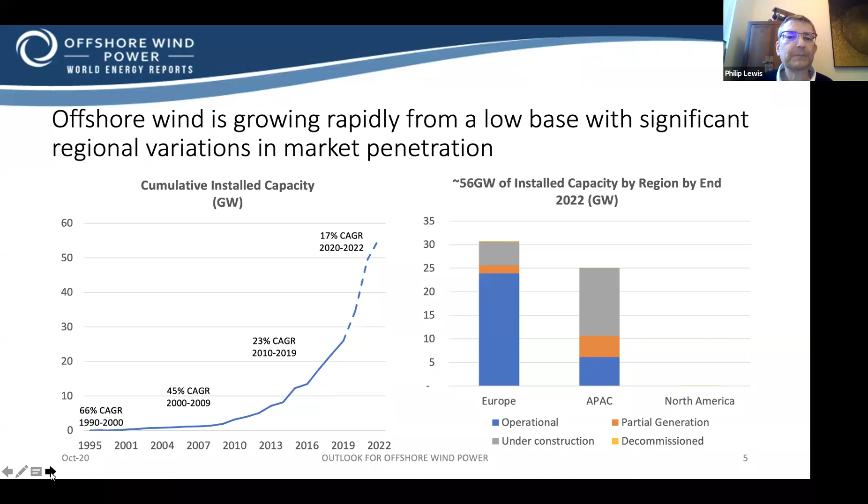Europe, Asia, and North America lead the way to around 205 gigawatts of installed capacity by 2030, calling for around $390 billion of investment. Again, driven by Europe, mainly the UK, and Asia, China driving there. And then we'll see the US become a top 3 player by the end of the decade. Next, please.

As the industry matures in key markets, CapEx and OpEx costs are falling, making wind more competitive. Offshore wind LCOE is reducing, witnessed by historic and current auction prices, and puts offshore wind in a competitive band with fossil fuels in European and Chinese markets, and is set to reduce around 10% each time installed capacity doubles.

Wind farm CapEx is around $3,000 per kilowatt with transmission, or around $2,000 per kilowatt excluding transmission, obviously with regional variations and project variations. Lifetime recurring OpEx provides significant opportunity for the OEM and logistics support supply chains. As we see from the pie chart on the right, O&M forms a major part of lifetime spend on an offshore wind farm, and turbines the largest single CapEx item. Next, please.

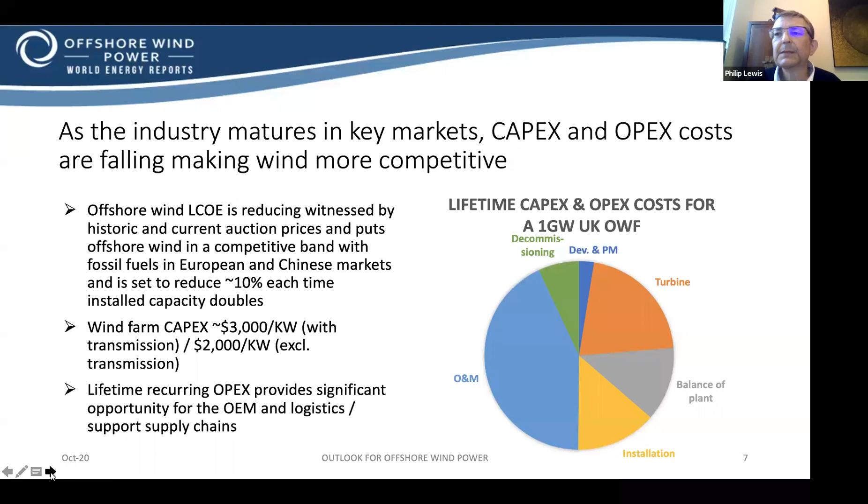So let's have a look at some of the technical developments in offshore wind, from foundations accommodating deeper water projects, turbines and installation vessels getting bigger, transmission substations getting bigger, and wind becoming a key element of supporting hydrogen in energy transition. Next, please.

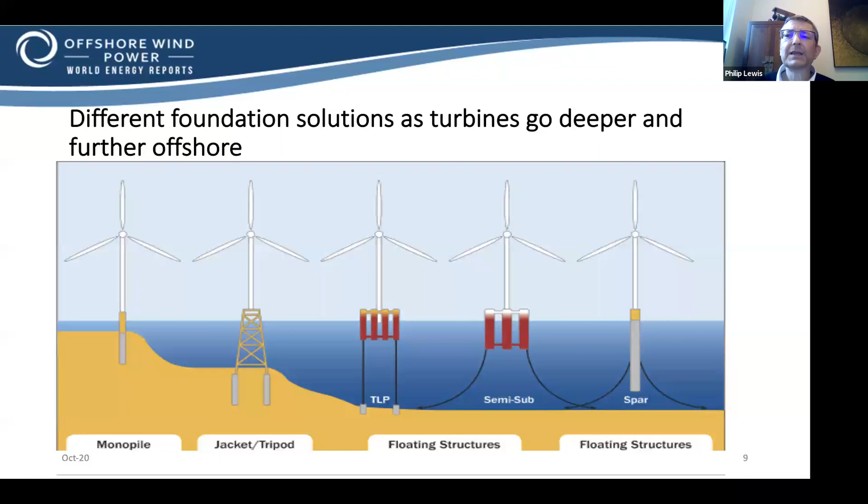So different foundation solutions are seen as turbines go deeper and further offshore, from monopiles and jackets, tripods, currently seen to be in a 50 to 60 meter maximum water depth, in the future probably going up to 70, 80 meters, with floating offshore solutions from 30 meters, but really cost competitive over 60 meters, and that's TLP, semi-subs and spars. Next, please.

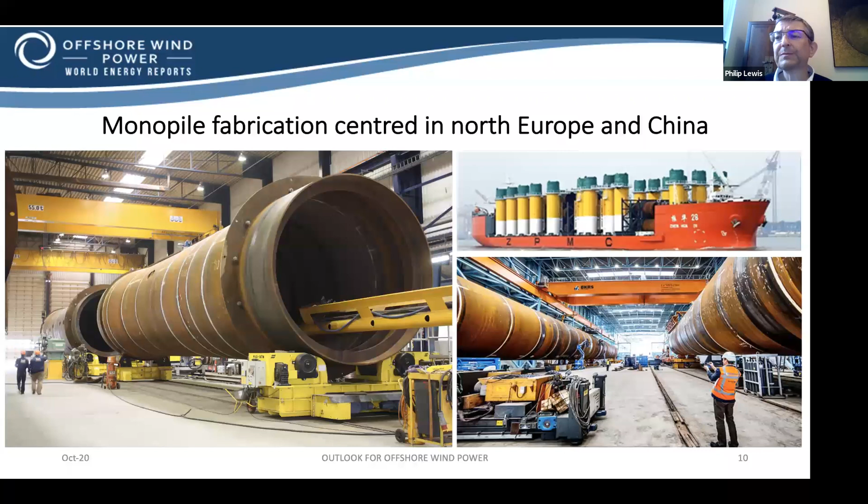Monopile fabrication is centered in North Europe and China. And for the US projects, we expect to see leading European manufacturers team up with US manufacturers, such as the Gulf Island and EEW tie-up from Massachusetts. Jackets are being fabricated from a wide European, Middle East, Southeast and East Asia yard base. As you can see from the pictures, a large amount of space is needed. We've seen in the US that Gulf Island produced the jackets for the Block Island offshore wind farm. Next, please.

Larger turbines are driving larger wind farms with higher capacity factors and lower costs. We are seeing the current 12 megawatt GE actually uprated to 13 megawatts, rolled out this year and next year, with a 220 meter rotor diameter, and the Siemens Gamesa unit at 14 megawatts, which has already been selected for projects in Taiwan and the US.

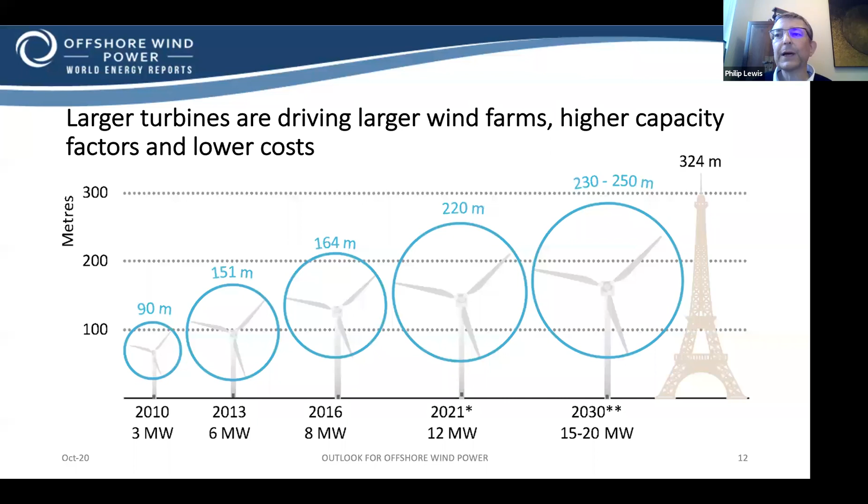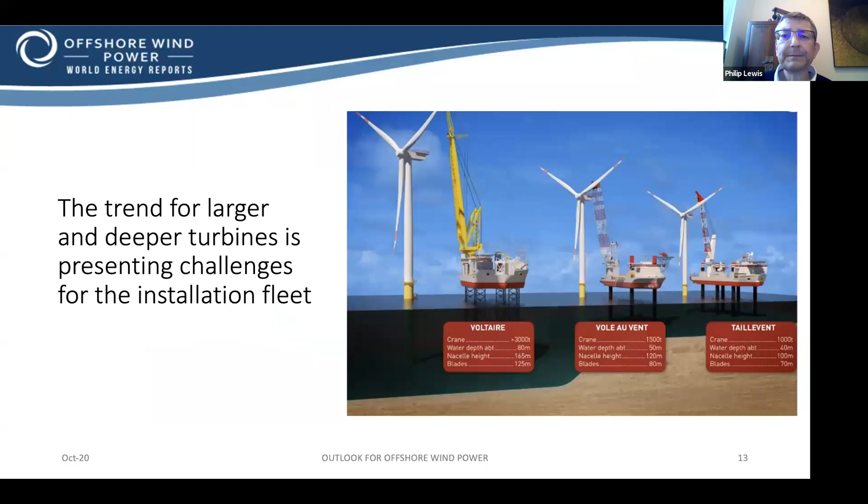The trend for larger and deeper turbines is presenting challenges for the installation fleet. Effectively, the new generation turbines cannot be installed by vessels that were built as close to 10 years ago. This creates opportunities for a wider range of vessels.

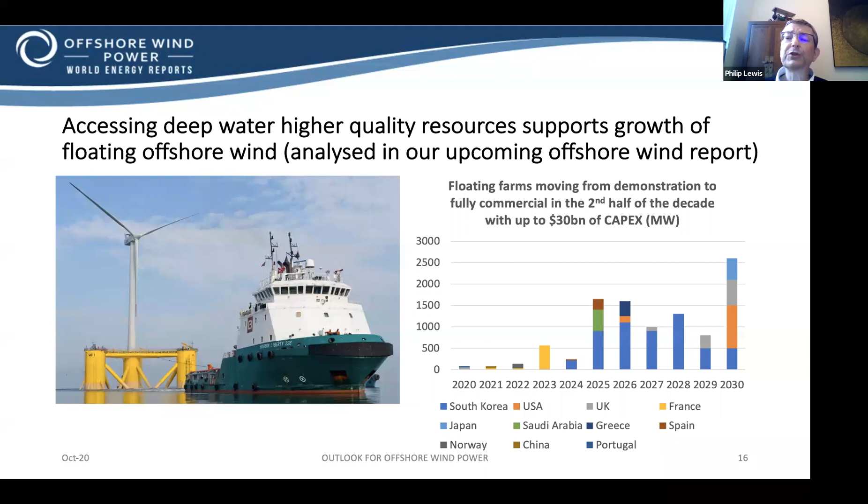Accessing deep water, higher quality resources supports growth of floating offshore wind, and this is analysed in our upcoming offshore wind report. Floating farms are moving from demonstration to fully commercial farms in the second half of this decade, with up to $30 billion of capex expected. We expect to see the first US commercial wind farm by the end of the decade or early next decade.

This large scale calls for an industrial approach to building offshore wind farms to feed installation. Foundations, fabrication and assembly for a 500 megawatt commercial wind farm can see 125,000 tons of steel to 425,000 tons of concrete used, basis delivering one foundation per week.

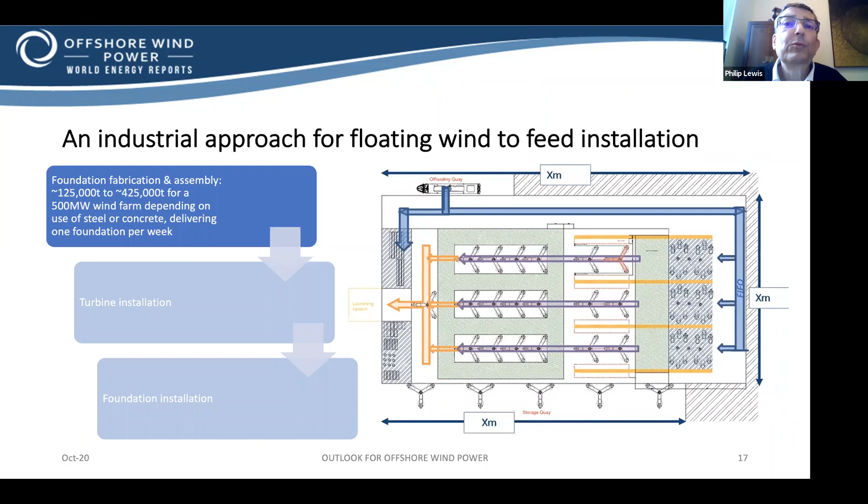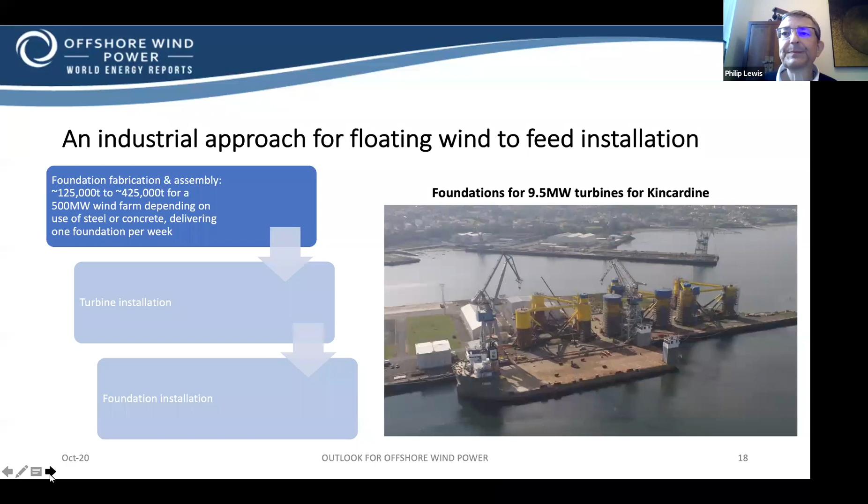Once the hull is produced, the turbine installation begins. On a 500 megawatt wind farm, we'd expect 30 to 40 floaters, basis 12 to 15 megawatt turbines, with 220 to 230 meter rotor diameters. This creates a storage challenge. As you can see from the photograph, these are quite sizable units. You cannot keep too many units at your quayside or in port; you need to start getting them into the offshore space and installing them as soon as possible.

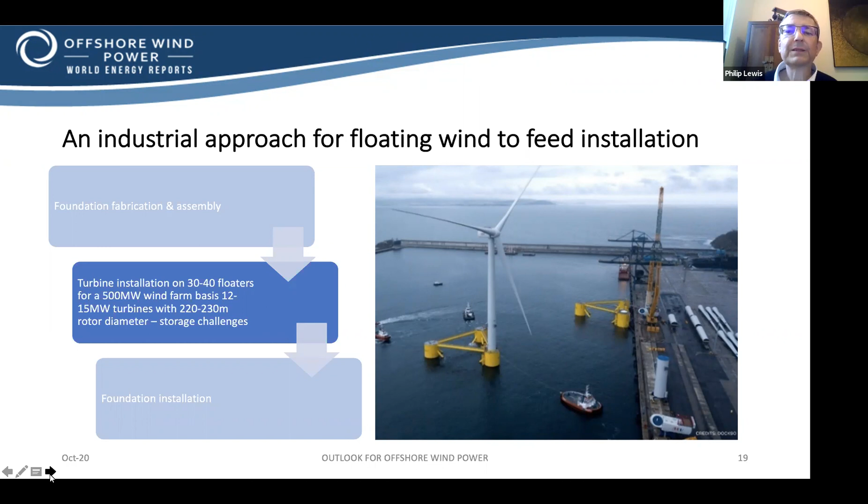With the foundation installation phase, we have towing, around 5,000 to 15,000 tons per floater at 2 to 3 knots, pre-laying 3 to 9 mooring spreads per floater. That's 100 to 300 anchors and chains or synthetic ropes on a 500 megawatt farm, and hooking up the whole system.

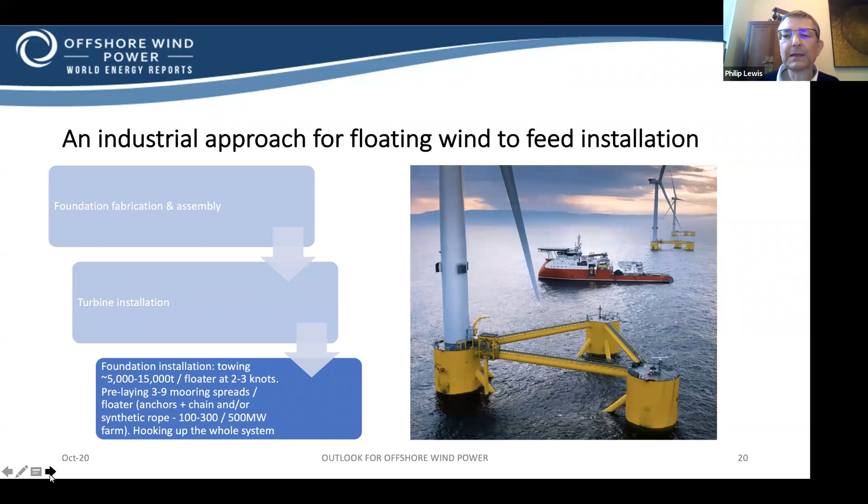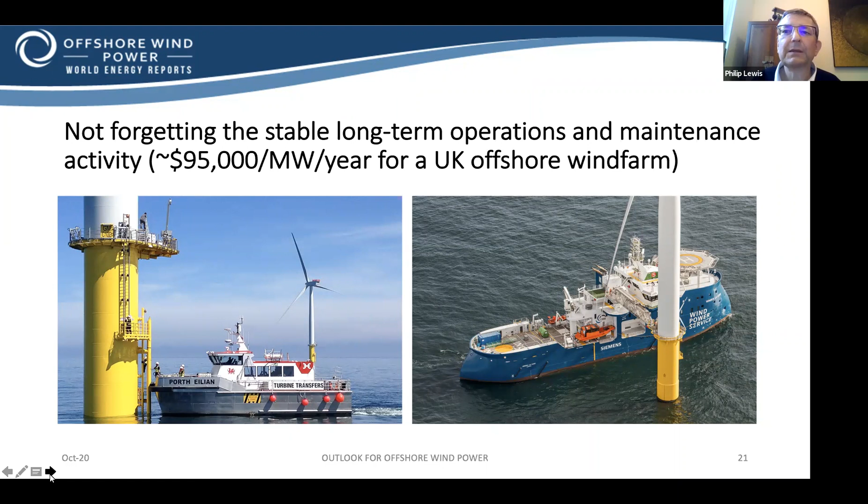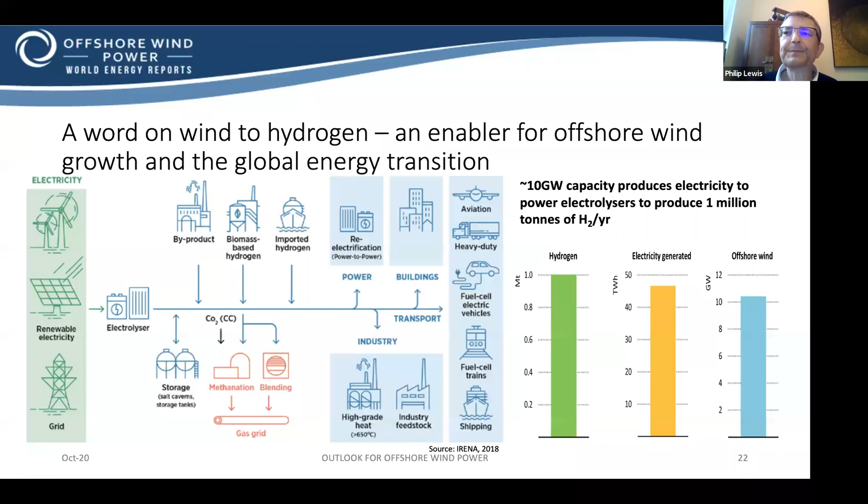So why is the US so interesting? Well, it's set to become a top 3 global player by the end of the decade. It has great potential in 5 zones: the North and South Atlantic, Pacific West Coast, Hawaii, the Great Lakes, and Gulf of Mexico, and a sustained pipeline to support the supply chain.

US technical potential is over 10 times current electricity consumption, equating to around 2,100 gigawatts of installed capacity potential. The gross technical potential for US offshore wind is around 46,000 terawatt hours, which is 10 times the roughly 4,500 terawatt hours annual demand. This converts to around 13,500 gigawatts of installed capacity.

That's gross potential. The graph on the right takes that gross potential and looks at what is actually technically feasible to produce. Starting at the North Atlantic, we see around a 45% conversion factor, going around to the Pacific, which has the largest gross resource, converting at around 5%. But in all that gives around 2,100 gigawatts of installed capacity potential, a major capacity in the US.

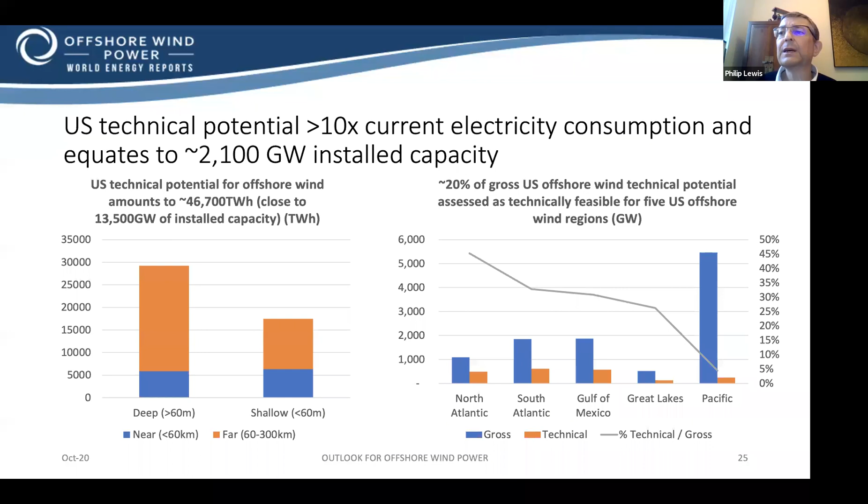BOEM, which looks after federal waters, is currently reviewing construction operation plans and site assessment plans for around 14.5 gigawatts of projects in federal waters. This is the bulk of US projects, although there are projects inland that fall outside BOEM's remit.

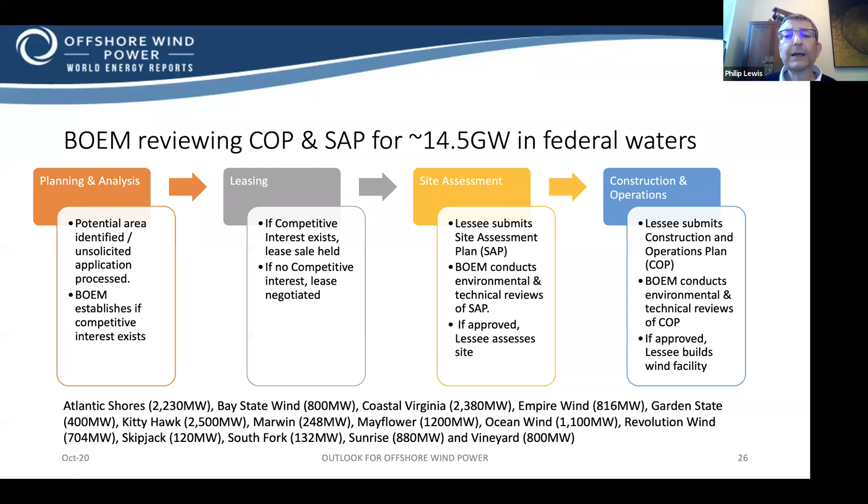There is a clear pipeline set by East Coast state procurement targets, indicating 12 gigawatts of installed capacity by 2030 for $23 to $36 billion of capex. This is underpinned by the 2035 targets for 29.1 gigawatts, which would amount to around $55 to $87 billion of capex, also creating $2.7 billion of annual OPEX spend once installed. Once these projects are approved—which we expect the first projects to be approved by BOEM at the end of this year or early next year—there'll be a large requirement for component manufacture, turbine installation capability, and onshore marshalling and support capacity.

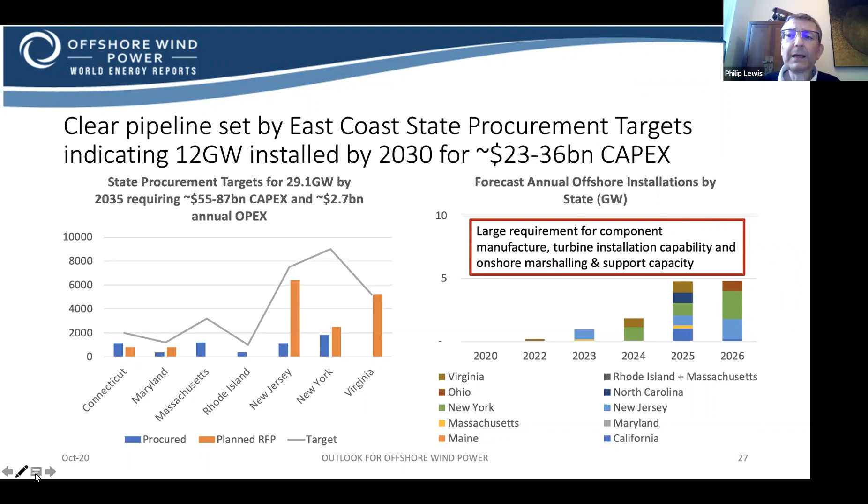Deep water potential in many states supports future floating offshore wind developments, especially in Maine, California, and Hawaii. The graph here shows areas in blue will be water depths under 60 meters, basically bottom fixed, and above 60 meters is red. Some states like Hawaii, California, and Maine have a very high proportion of deep water over 60 meters.

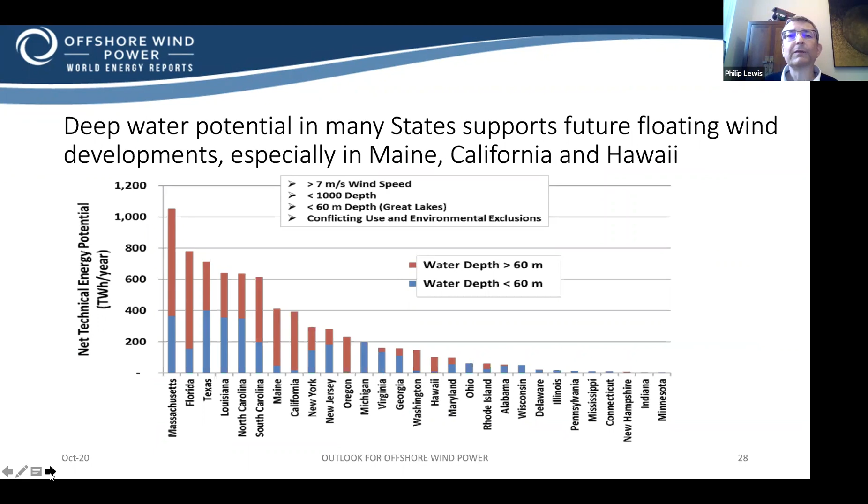Let's take away the opportunities and challenges for the US market. The US is home to a technically exploitable offshore wind resource, over 10 times current electricity demand. The US has the second largest global wind installed capacity and can be a top 3 offshore wind player by 2030. There are large amounts of capital required to meet state procurement targets, providing opportunities for investors, insurers, domestic manufacturers, service providers, and port developments.

A recurring annual $2.7 billion of OPEX once the state procurement targets are met, supporting manufacturers, local supply chains, and offshore vessel operators. The deep water potential calling for floating turbines will leverage the skills of the offshore oil and gas supply chain.

There are challenges such as competing demand for cheap gas and coal, which we see offset by lowering LCOE as capacity increases. There's a comparatively low level of investment and even strategic interest of US majors in offshore wind. This will be offset by the interest of European majors and European utilities.

There are challenges and opportunities to develop on and offshore grid transmission infrastructure, which is a whole new separate topic. Building local supply chains quickly enough to meet large project requirements while identifying a sustainable pipeline of projects to maintain supply chain activities—we want to avoid a boom and bust situation. Balancing strong local content policy, including Jones Act requirements, could impact project economics, but that can be mitigated by partnerships with established players to create significant opportunities for US suppliers.

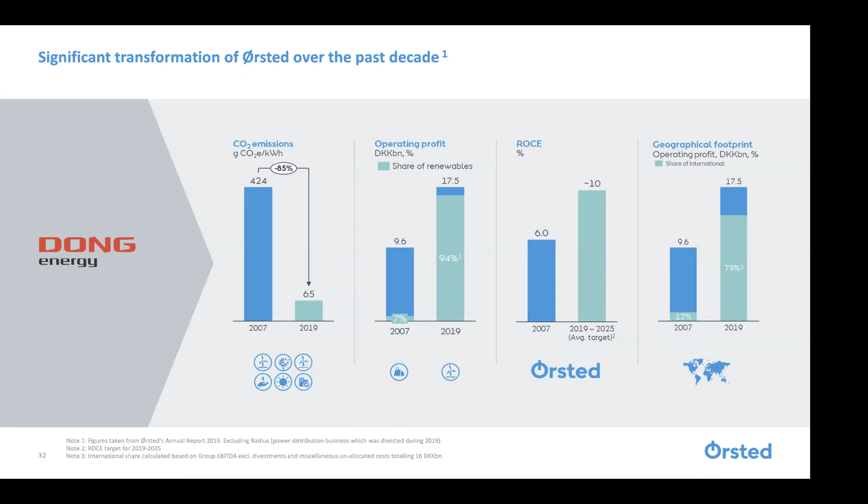Today, offshore wind is the fastest growing renewable energy technology in the world, and Orsted has nearly 30% of the global market share. We pioneered the technology back in 1991. By today's standards, the tiny Vindeby project off the coast of Denmark was a 5 megawatt wind farm comprised of 11 individual turbines. Today, as Philip pointed out, any individual turbine is much larger than the combined capacity of the Vindeby farm.

We've really had a strategic focus on driving down the cost of offshore wind, primarily through exploiting economies of scale and the technology - bigger individual turbines, bigger wind farms, standardizing installation and operation, and maturing the supply chain to achieve scale. As Philip noted, costs of offshore wind have come down dramatically, so that in mature markets like Europe, we are already cost competitive with other renewable and conventional fossil generation, and we're quickly getting there in emerging markets like the US as well.

Earlier this year, we commissioned the world's largest offshore wind farm at Hornsea in the UK. That's a 1,200 megawatt project. Just to give you some context, a single revolution of the turbine at Hornsea generates enough electricity to power the average British home for 24 hours.

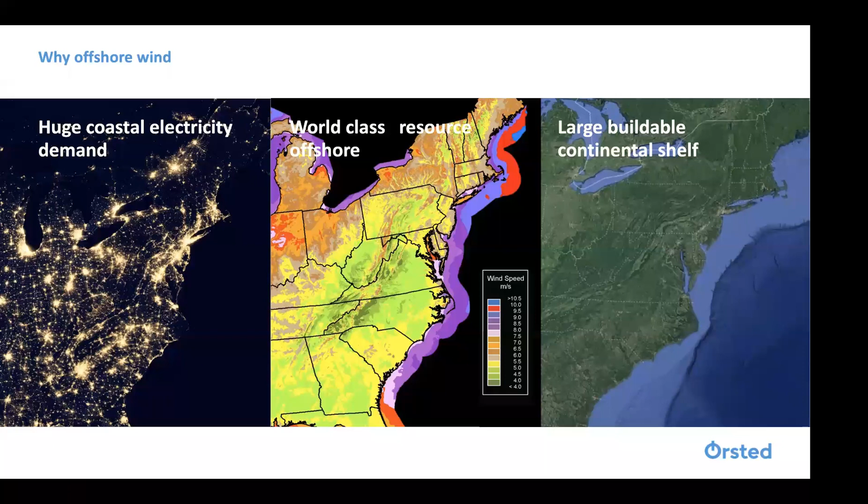And finally, we have shallow water depths along the eastern seaboard. It's a large buildable continental shelf, which allows us to use fixed bottom conventional technology that we're accustomed to in Europe.

But I would say the fourth factor is really policy - it's the states' progressive policies along the eastern seaboard that's really driving the offshore wind market in the US today. Several states have stepped up, and today we're looking at a 25 plus gigawatt market by 2035. That is really driving interest and investment.

Orsted was really the first major offshore wind developer to enter the US market, but we have significant company from major investor-owned utilities and other oil and gas developers looking to transfer their skill sets.

So we think we're really well positioned. We have a number of wind energy areas that have been competitively auctioned through BOEM. This real estate is strategically located proximate to the key markets I identified. We've been very successful in the first round of auctions conducted across the Northeast US, and as a result, we have at this point nearly 3 gigawatts of offtake with the states.

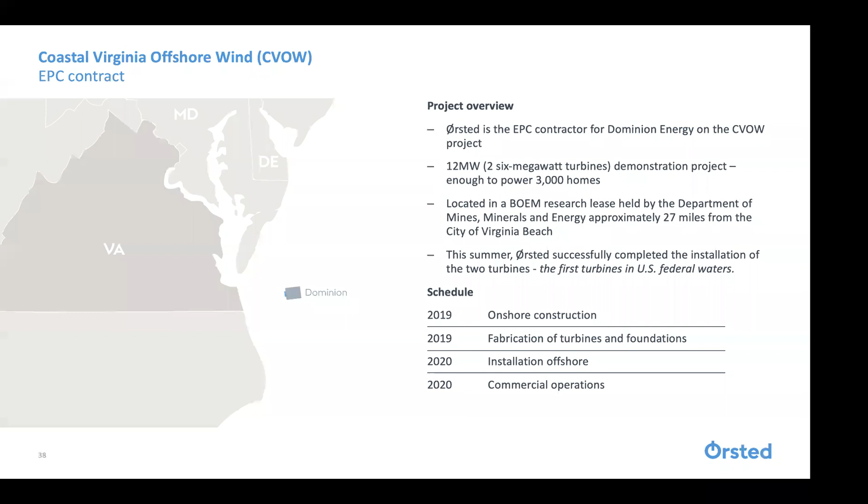Obviously, to develop an entirely new heavy industry in the US requires significant investment, and certainly a foundational element of this is maturing the U.S. offshore market by improving and modernizing our ports and harbors for the deployment of offshore wind. Orsted is making a number of investments in various ports and harbor facilities across the eastern seaboard, whether for pre-assembly and loadout or construction, manufacturing and supply chain, and longer-term O&M activities. The need for redevelopment and modernization of our ports and harbors infrastructure is tremendous. We've been actively engaged in public-private partnerships across our footprint to bring these necessary infrastructure investments to fruition, and with it, the significant job and economic development opportunities for our host communities.

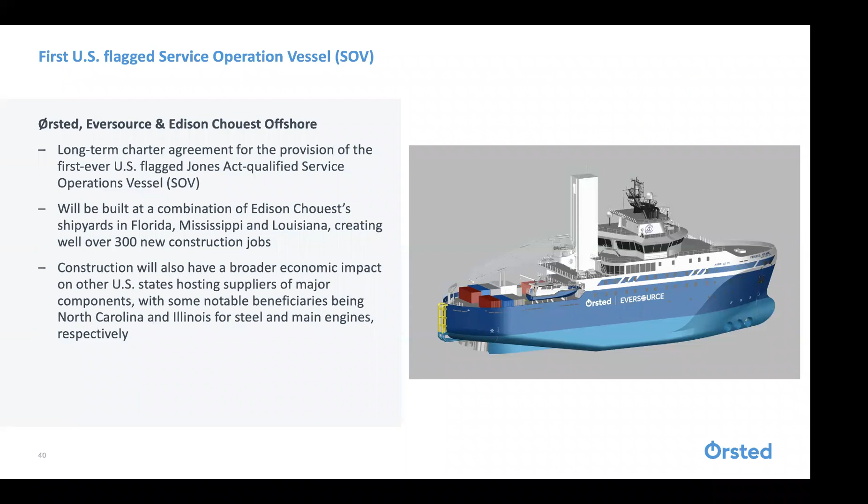Now, as I hope you can see from my presentation this morning, Orsted is quite bullish on the US offshore market. That's not to say that standing up a new US-based heavy industry is without its challenges. In particular, I want to stress the importance of seeing progress at the federal level for the permitting of these projects. As you may know, the Department of Interior has put a hold on all permitting of offshore wind pending the completion of a cumulative impact study examining the economic and environmental effects of the expected build out of East Coast lease areas in response to state demand. No commercial scale wind farms have been permitted yet in the US.

This has caused over a year's delay, creating serious disruption to our procurement and construction schedules. BOEM is due to release the results of this study in mid-November, and we remain hopeful that this milestone will mark the resumption of the industry's forward progress.

As excited as we are about the ECHO vessel investment, we have a lot more activity in the pipeline that we're anxious to bring forward. Thank you for your attention this morning, and I look forward to the Q&A later this morning.

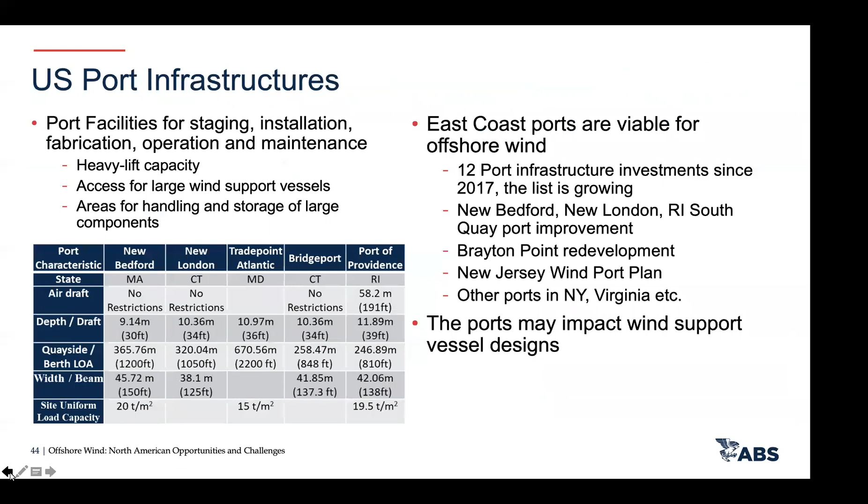Specific to floating wind, though, this is even more applicable. ABS really has positioned itself, as many other classes, as the trusted advisor and third party involved in the floating wind market for more than 10 years, with experience on more than 10 different types of design concepts.

Those projects today include 3 8.4 megawatt units offshore of Portugal and 5 9.5 megawatt units offshore of Scotland, totaling 80 megawatts of installed projects. ABS has been providing class support during the global energy transition and through the development of these projects offshore, providing the class service and independent verification necessary to ensure that the assets themselves are able to perform as expected, and doing so in a safe and efficient manner.

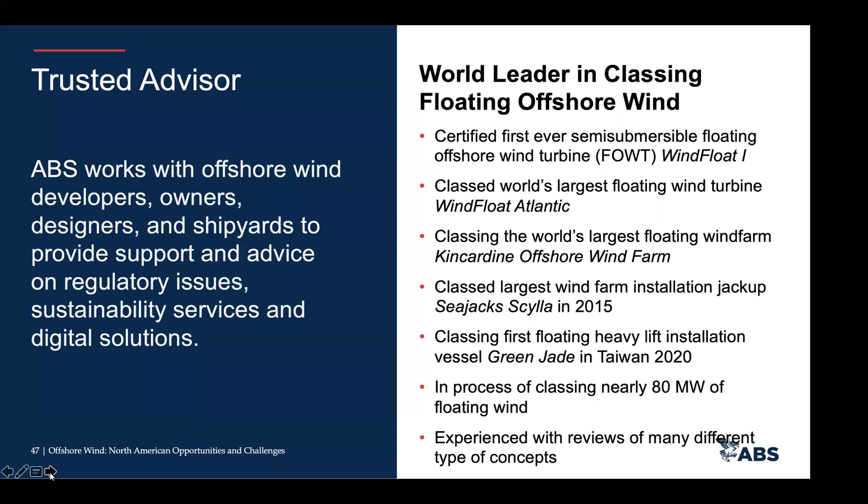Looking specifically at some of the rules, standards, and activities that ABS has been involved in, ABS approaches offshore wind very similar to what we've done with the rest of the offshore industry for the last 70 years, focusing primarily on the floating structure with its mooring and marine systems, and applying the same principles to bottom-founded installations as well.

For the turbine itself, right now in floating wind, the trend is to use the same series of turbines currently used in bottom-fixed offshore wind developments. We don't foresee there being any unique requirements for the turbine itself, and expect to continue to rely on the IEC type certification scheme that's proven to be successful over the last decade.

Going back to the floater, the main difference from a traditional production platform that you would have offshore for hydrocarbon production is the loads, because the actual physical loads on the floating asset itself are now horizontal instead of vertical. And so as engineers, how we go about analyzing these loads has to change.

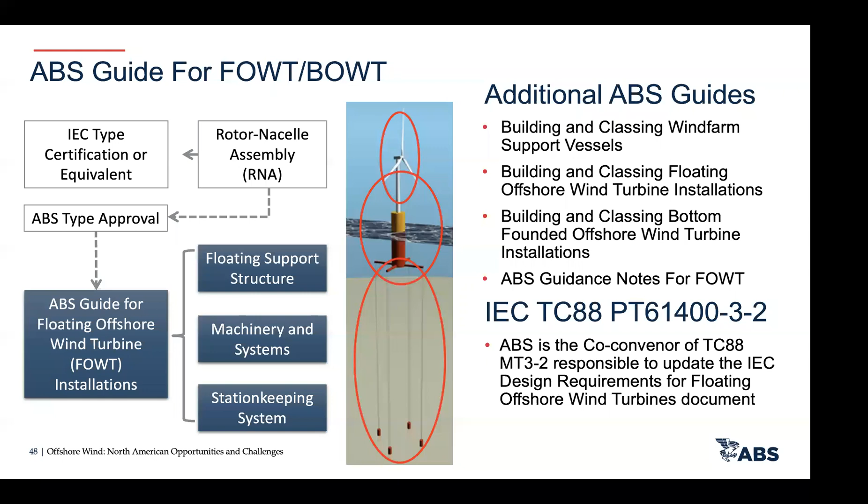To support this, ABS has developed guidance notes on global performance analysis for floating offshore wind turbines, and there are additional guides available. ABS actually sits on the IEC TC88 panel that has been convened to standardize the global design requirements for floating offshore wind turbines.

So ABS offers a roadmap supporting the projects from concept, basic design, and detailed design through construction and operations. Due to the ever-increasing environmental regulations, owners of wind farm support vessels may consider adoption of green technologies such as hybrid electric power and alternative fuel sources to reduce emissions and innovate along a low carbon footprint.

But regardless of the vessel's design or its fuel, ABS can provide classification services for a wide range of wind farm vessels and the wind farms themselves. Our goal at ABS is to support the industry's adoption of new technologies, making offshore operations safer and more efficient.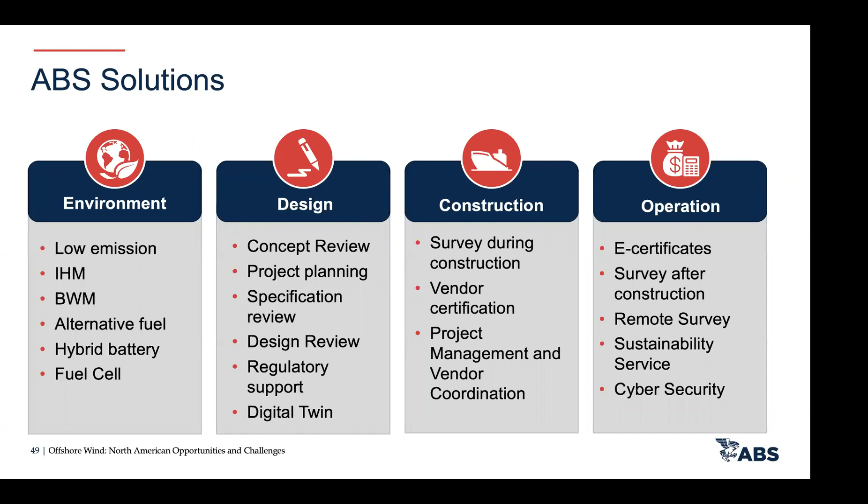I'd like to end with referencing 3 different projects, one of which was mentioned today, and touch on a few highlights to give you an example of some of the activity that's occurred over the last few years. We heard about the Block Island wind farm that Fred mentioned a little earlier, and to frame the installation of this wind farm, I'd like to share a little bit about some of the vessels that worked on this project.

The Weeks Marine Jones Act vessels, the Weeks 533 and 526, were used to install the jacket foundations offshore. The Seacor Marine Jones Act lift boat LB Robert assisted with the foundation installation and was used for piling and lifting the platform. Fred Olsen's wind carrier foreign flag jack-up vessel, the Brave Tern, was actually the vessel used to install the 5 wind turbines — that's the one foreign flag vessel we're going to talk about here.

But as well, due to the Jones Act, the Seacor Marine liftboats Paul and Caitlin were used to deliver the wind turbine tower components, including the blades, nacelles, and tower sections, to the wind farm project site. And lastly, Atlantic Wind Transfers' Atlantic Pioneer, the first US-built crew transfer vessel, has a 20-year contract to provide transfer and service of personnel to the site. So in total, we're counting 6 different Jones Act vessels that were utilized installing this one project offshore.

Second is the VARD 407 SOV. ABS has granted the first approval in principle to VARD for its design of a Jones Act service operations vessel. The AIP was awarded at the Workboat Show in 2019, where VARD has developed a customized version of their 407 design for a US variant, compliant with the requirements in the United States for a US flag vessel.

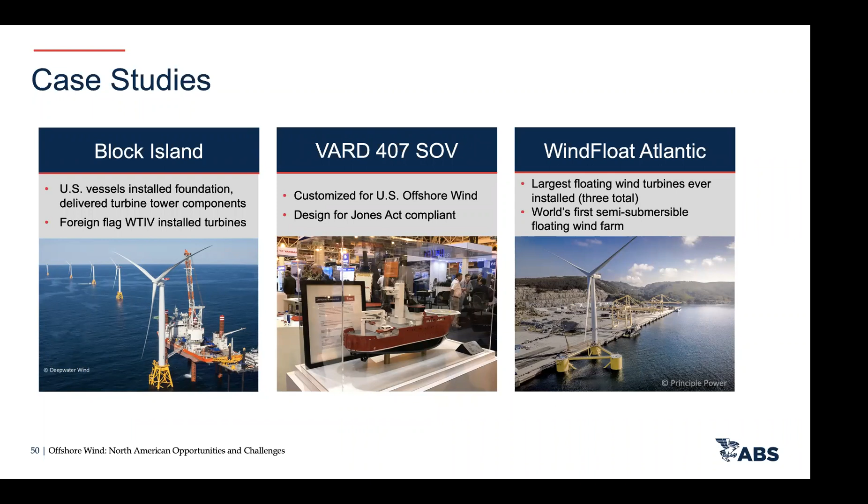So lastly, I just want to mention the University of Maine development that we believe will be the first commercial scaled floating offshore wind turbine in US waters. ABS has also been involved with that project from its start, and 100% of that preliminary design review has been completed.